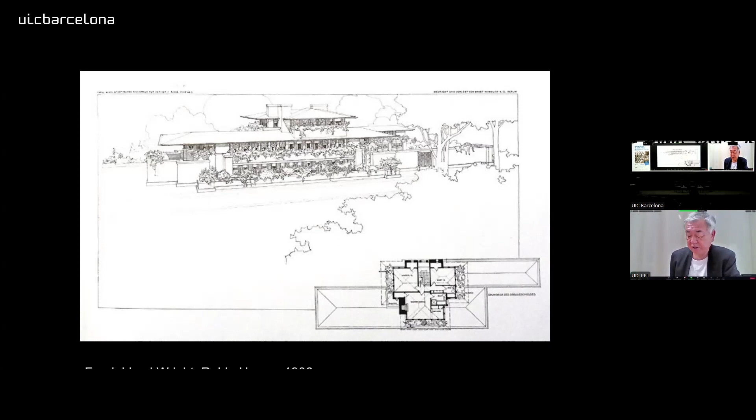In Japanese villages and towns, we had the mountain behind the village. That means the village was not away from the mountain — it was sitting beside the mountain, because their life could not exist without the natural resources of the mountain. All the materials they needed for life came from the mountain, and energy came from the mountain.

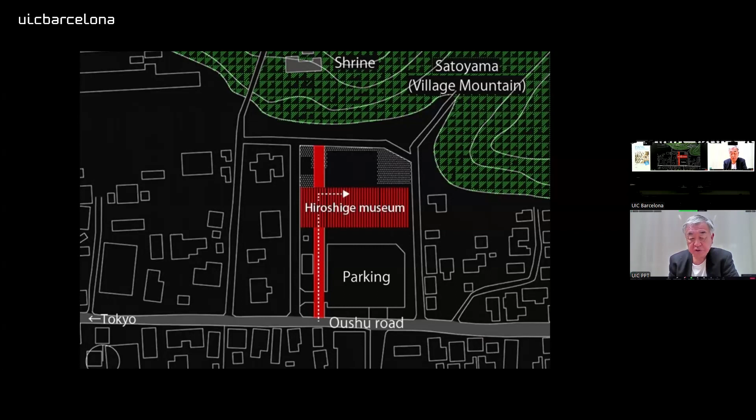The aim of the Hiroshige Museum is to reconnect the mountain and the village again. So we designed the passage to the mountain, and the approach to the museum is from behind the building.

Not from the parking in front. After passing the building and crossing the hall, people can find the abandoned shrine and abandoned Satoyama, and after that experience, finally people can enter the building, and through this experience, people can recover.

The connection is most important, and without the connection with nature, we cannot survive. This is a big finding of this approach.

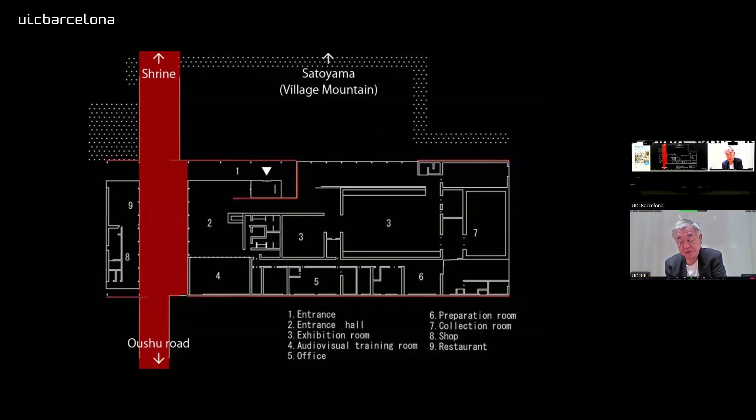Material-wise, we try to connect the mountain and the building again. It is a totally different approach from the 20th century, when materials for the building all came from outside the village. The concrete, steel, every material came from outside, sometimes from other countries. The cheapest material was the best material—this was a rule of the 20th century.

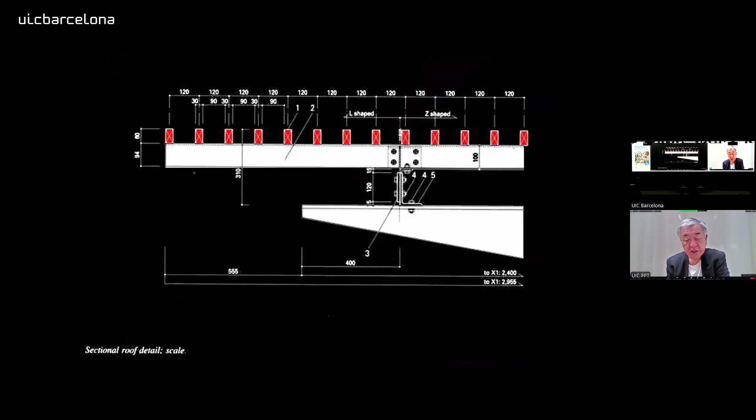For this building, most of the materials came from the mountain behind. The wood came from the mountain behind, and other materials, for example the stone, also came from the quarry of the mountain behind, and the white paper we used came from special trees of the mountain behind. Local craftsmen worked on the paper making, and most materials and craftsmanship came from connecting the mountain and the building.

This was the typical Japanese system before the 19th century. But in the 20th century, after American civilization came to Japan, that connection, that relationship, was totally forgotten.

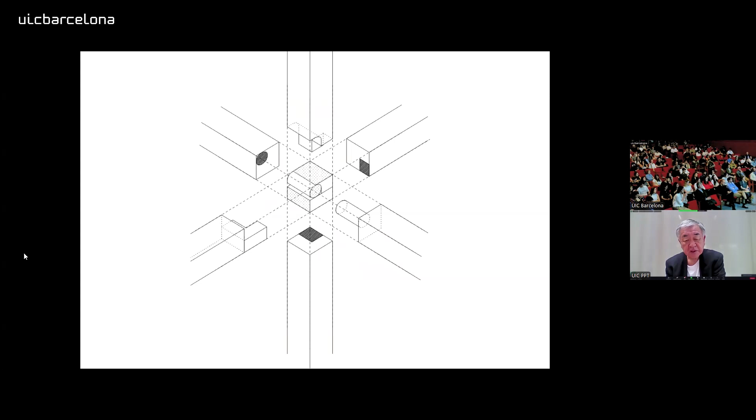It is a typical joinery of Japanese traditional building—three types of joints assembled together, twisted and finished. The Japanese carpenter provided us with this kind of small bar, and on site my students assembled them together to create this small pavilion, without any nail, without any metal.

After this project, we tried to bring this idea to a bigger project. At Tokyo University, Professor Sato checked the strength of this joinery system. This is a section of the museum.

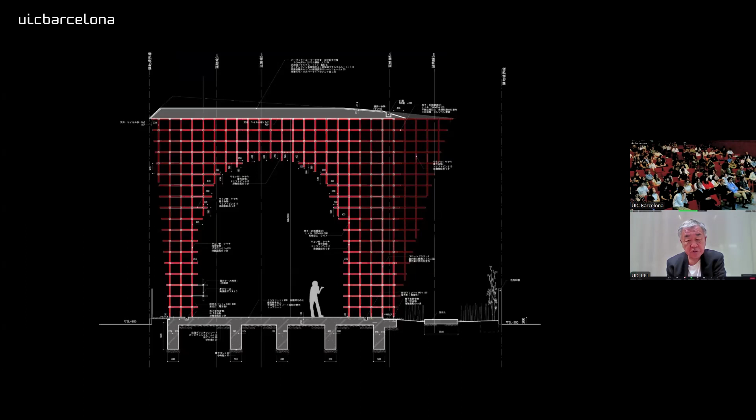The section of this—the size of these bars is 6 centimeters by 6 centimeters, a very, very tiny thing. We tried to create transparency and a relationship between exterior and interior—connected, but still we can have some privacy. A sense of safety and a sense of privacy is important for life.

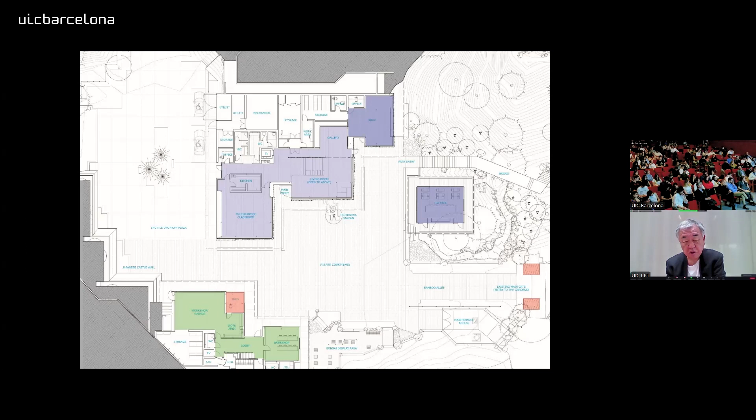And in the States, we did design a Portland Japanese garden with this cultural complex. Again, the building and the forest behind are connected by vegetation on the roof, and the life in the forest is merging into the building.

Life and artifact are not separated, they're connected. The building is not enclosed—every door, every window is openable, and the outside and interior are totally connected, like this.

We used local materials as much as possible, wood from Portland, Oregon, with transparency and connection.

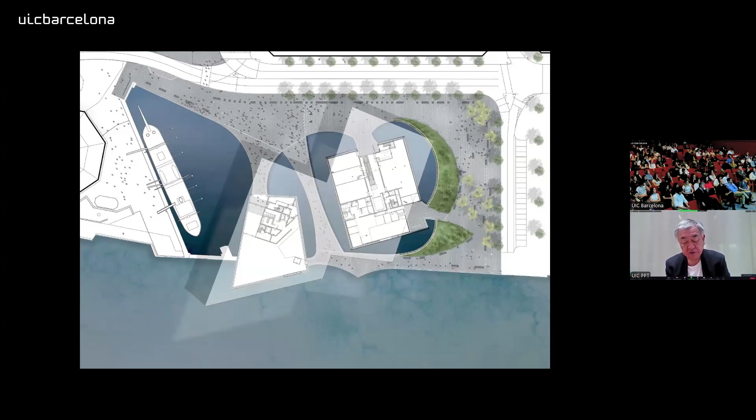In Scotland, this is a little bit different approach. We tried to connect the water and land. Close to the site, we found this beautiful sea cliff, and we tried to bring this relationship into the building—we pushed the building into the river, creating a new relationship between land and river.

For this, we didn't use wood because the condition is not mild. The facades, similar to the sea cliff, give a new impression for the building—it is not an artificial vertical wall. The porous wall creates a new, soft relationship between the environment and the building.

In the center of the building, we cut a hole—a similar approach to the Hiroshige Museum, where we cut the building to connect the village and the mountain. In Scotland, we cut the building to create a new relationship between the city and the river in front.

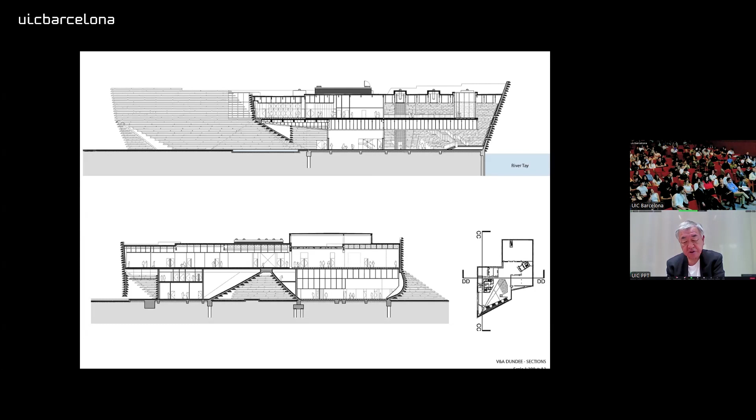In the building, we used local wood to create another type of cave. Avoiding vertical walls is the same approach, and people call this building a living room for the city, as they come to the opening. As in Denmark, an example is the Christian Andersen Museum.

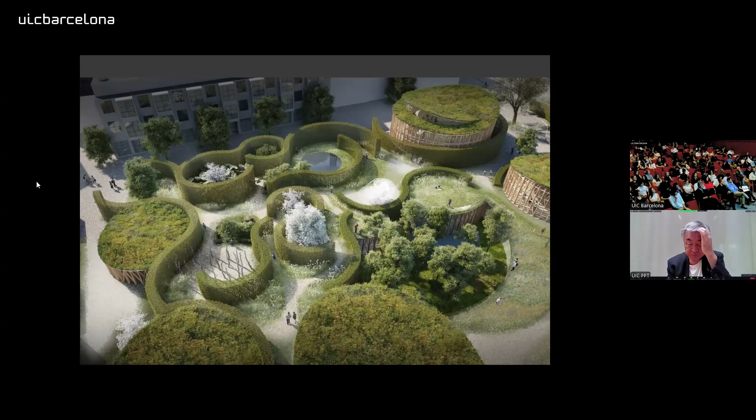This is a rendering for the building, in the city called Odense. This is not a big city, and most of the buildings have a low silhouette. We tried to merge the museum into this low silhouette.

Finally, our solution is the museum as garden. The height of the museum is lower than the neighboring buildings, with wooden structures and a wood outside margin.

Christian Andersen is a famous fairy tale author, and each fairy tale is connected with gardens. The kids can enjoy the secret feeling of each garden.

Green is again the best way to create the space. Instead of a wall, we used green for making the story and for making a special experience for kids.

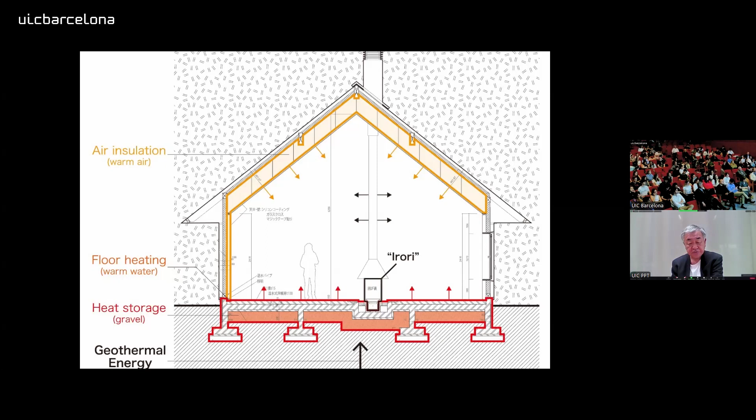We learned that system and applied it to this experimental house. Without insulation, this system can warm up the space even in minus 30 degrees, so people can enjoy the warmness and softness together in this house, like this.

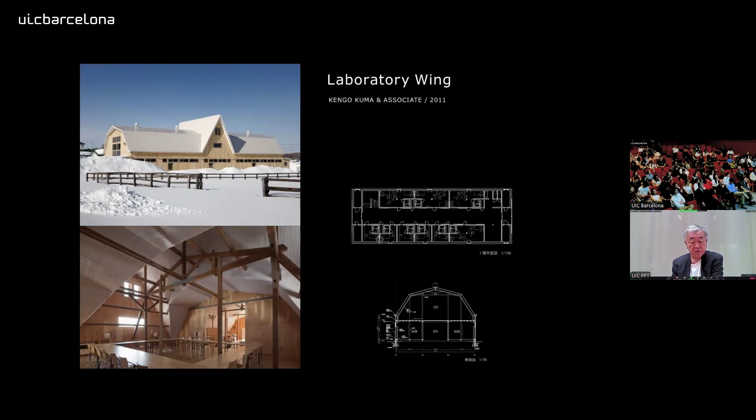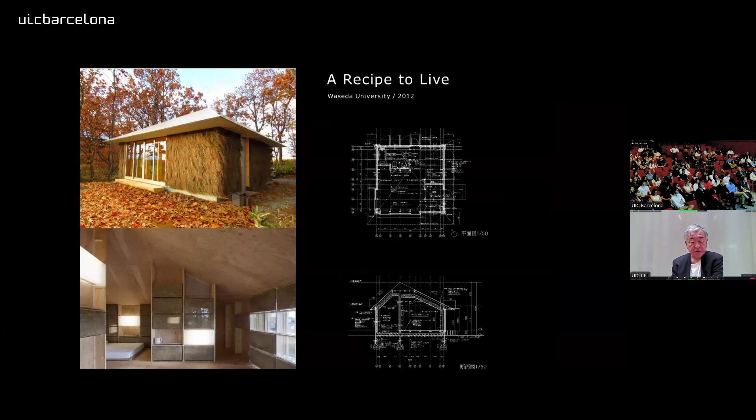In this Hokkaido area, as part of Tokyo University, I still teach at Tokyo University, working with other universities to create experimental houses. This is an experimental building by Tokyo University, a collaboration with other universities including Keio University, Harvard, and Berkeley, and Dutch academies. We really enjoy the collaboration with other universities to find unique ways in the tough climate.

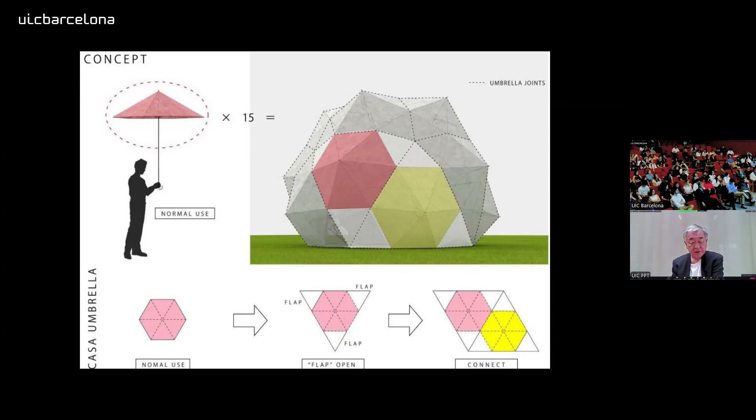This small project is for the Milano Triennale. It's a small house for disaster. We used umbrellas. Our idea is that if 15 umbrellas are assembled together, they can become a new house. It's a special umbrella we designed for this disaster house, and 15 students worked together to assemble those umbrellas.

Another softness, another lightness, another relationship with the environment. The material unit is just the umbrella. Structurally it's a tensegrity structure, so we didn't create a frame. Membrane and very tiny bars work together. It's the magic of tensegrity.

The 15 students, after working together to assemble it, drink together and sleep together in this small pavilion. It's another nomadic lifestyle. This is the material.

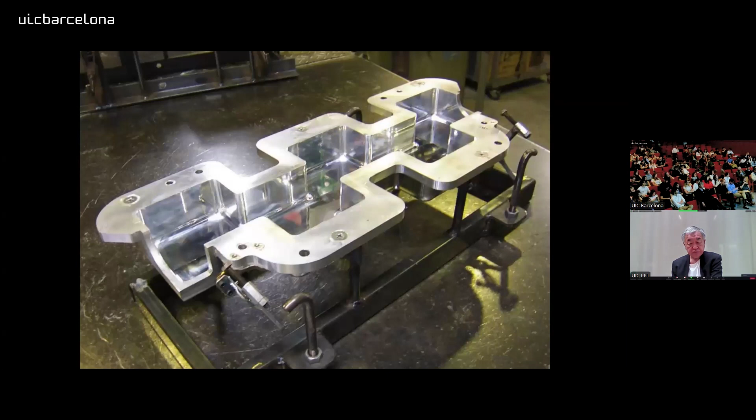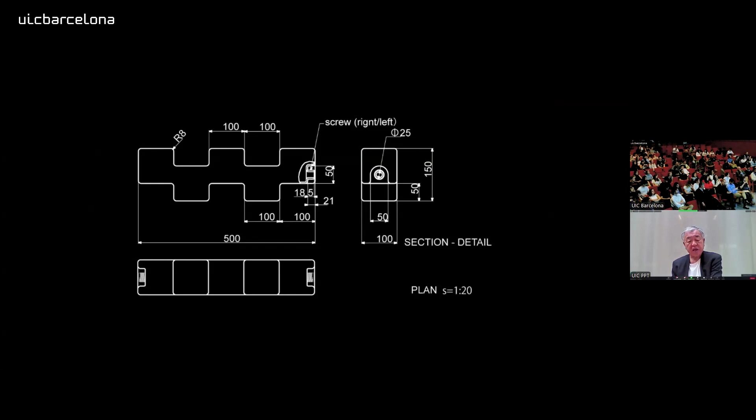This is the process of making the poly tanks. This poly tank has two valves to create the water flow to the adjacent tanks.

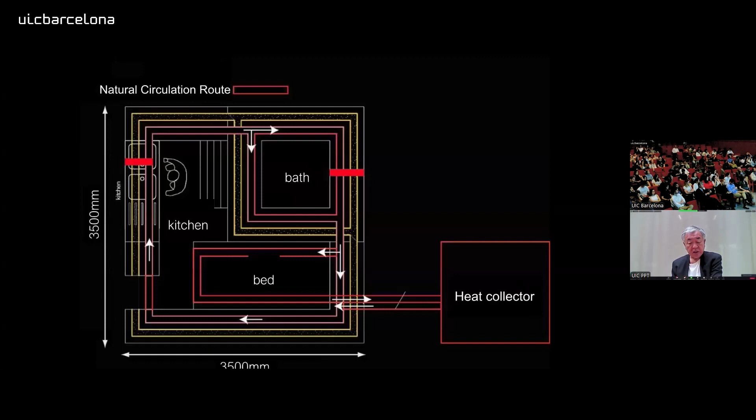And this is connected to the unit that can control the temperature of the building, the wall, the floors, and the ceiling. They're all connected with pipes, and the heated waters and the chilled waters can change the temperature of the place.

Our idea is a kind of body of life. Our body is always controlled by the flow of blood and flow of other liquids. Flow is a key word for life, and the flow is related with connectivity with the environment, a relationship with the environment, as our students really enjoyed making this.

This is an experimental pavilion. This is the interior. One single unit can make every necessary furniture. The bathtub, the sofas, and the kitchens are all made by one unit. It is similar to our body. The small cells can create anything.

That idea is very different from the biology of the 19th century. In the 19th century, people thought we were an assembly of organs - the stomach, bones - but now new biology teaches us that we are assemblies of small cells, and the flow of liquid connecting those cells. It is a new idea of philosophy, a new idea of biology, and we try to apply that idea to the building.

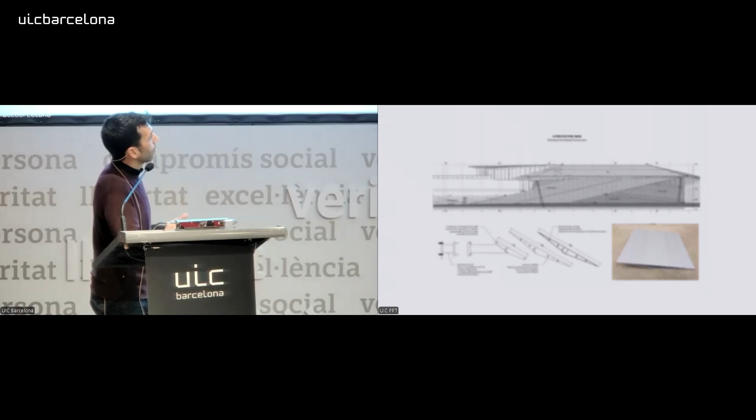We had discussions with the companies about the finish of these metal plates, and contrary to what they expected, we didn't want any perfect finish. We were trying to make the company do mistakes in the chain of production so we'd find some scratches all around the mock-ups. As you can see, we have these traces of the extrusion process that we wanted to keep as part of the language and roughness of this metal facade. We're very interested in taking this industrial process and making evidence of the process of production of these pieces.

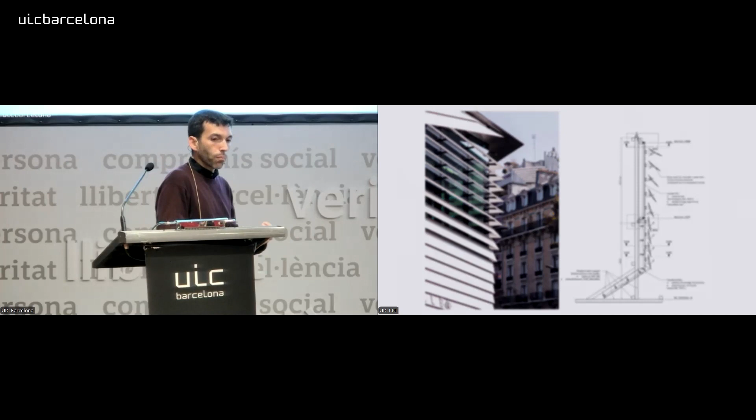Of course, it's a museum of photography, so we were asked very intensively about controlling the light. One of the most important points was how to provide a scheme that protects from direct sun from south and east, and how we could filter light. So here we have these louvers that get twisted, and they allow the light to enter in a very subtle way inside the museum.

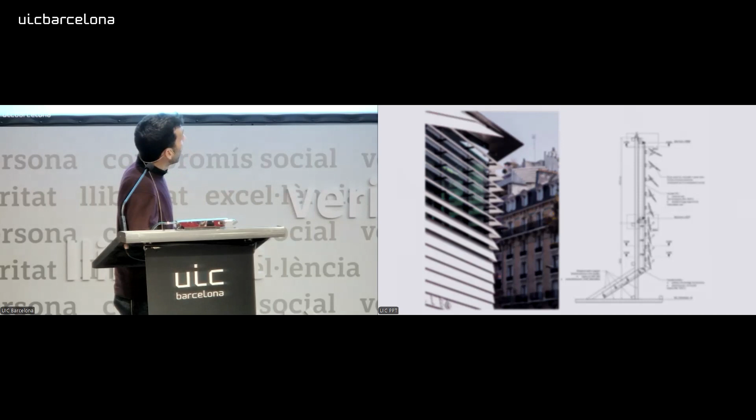This is how, if you go now to Boulogne, it looks like. We have this kind of feeling of a wall - it's even a bit aggressive somehow, but the idea was to really separate the boundary of civilization and garden.

Now is when things get interesting, because Japanese tradition has always worked with a task repeated over centuries: enclosing a garden and later creating a threshold. The idea of a threshold in Japanese tradition is key. If you ever visit Japan, you'll see that whenever you access a garden or building, the way you access it is super thought out.

The Chinese tradition arrived over Japan and imposed some symmetrical models, palaces, etc. But actually, Japanese people never really absorbed this symmetry, this symmetrical design. They always worked in an asymmetrical way, and this is related somehow even to the ancestor religion they had, Shinto, where they believed that if you gave spirits a straight line, they would enter. So they tried to generate other lines in order to avoid it.

There are these kinds of primitive beliefs that are very interesting. Even when you go to a tea house, like Kuma was talking about, it's not only the tea house, but the access to the tea house, what's called the roji, the path leading to the tea house.

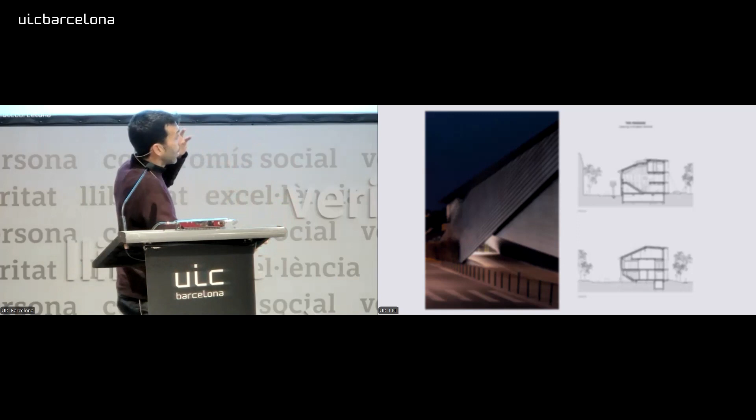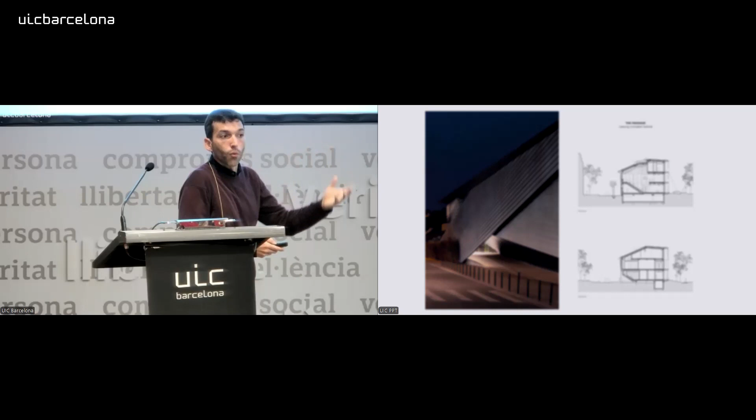And this tunnel, if you ever go there, believe me, you start forgetting the noise of the city, the noise of the cars. You are preparing your mind for the discovery of a new realm. That's the garden.

So this is the moment of the folding, the passage. Maybe not the most conventional way to access a museum, but we wanted to create these sequences of access that lead to a first courtyard placed here.

It's actually an open lobby, because from there we can distribute the program, but this diagonal was one of the key features of the proposal—this oblique access that suddenly discovers this tiny space and also gives you a first hint of the garden just across.

And we had to respond to all French regulations about accessibility when doing a folding—handicap access, and visibility for people with visual problems.

So we were working with concrete again, an industrial product, an industrial material, but trying to craft it, trying to make it somehow a material that could turn back to a less industrial way of putting it.

So what we did was, as you can see here, we brought in a tool from Japan in order to create these undulations that were reminding us of Zen gardens, in order to respond to French regulations about accessibility. We learned with the company how to use this on such big pieces.

They were passing this tool like the monks in Zen gardens that use it to decorate the garden—I don't know this word in English—but the same thing, done in concrete.

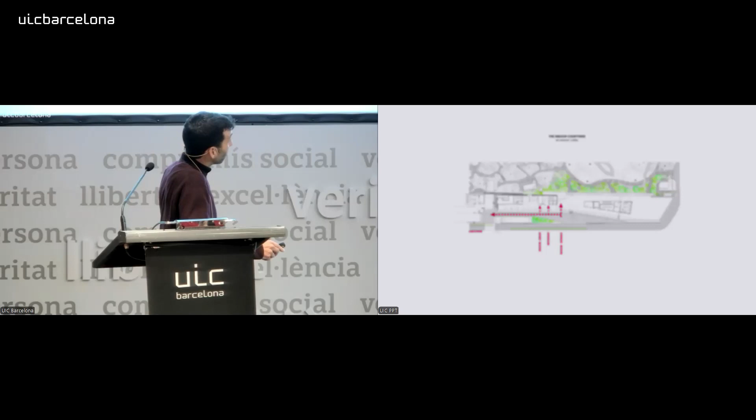But we will talk about this later. Let's see, this is the moment of the entrance, but let me introduce you to this second main concept of this project, which is the Engawa.

So we have seen this very enclosed facade facing the city, but what was the relation towards the garden that we wanted to propose? Because this was the key feature of the building.

So in Japan there is a particular space called Engawa. This is a term that doesn't exist in the Chinese language—it's a Japanese term. I say this because a lot of elements of Japanese culture were absorbed from China and Korea, even Buddhism arrived through them. But Engawa was something very particular to the Japanese home.

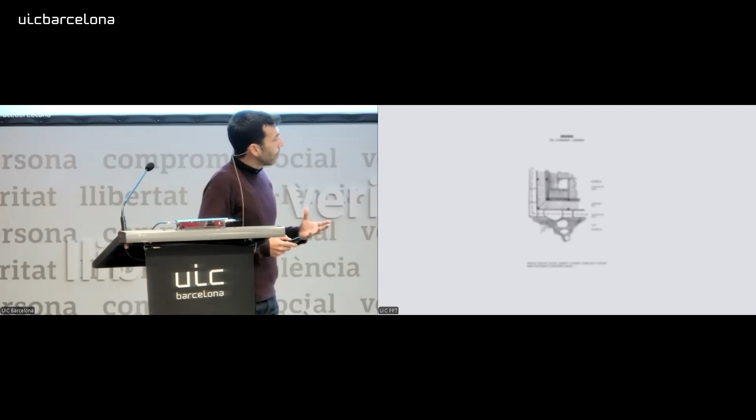And if you put Engawa into Google, you will find a bunch of translations. I noted some of them: veranda, balcony, corridor, platform, circulation, buffer zone, transition space, fluid space, contemplation device. What's interesting is that this semantic plurality means this space is something very ambiguous, and it's something we really wanted to try to find.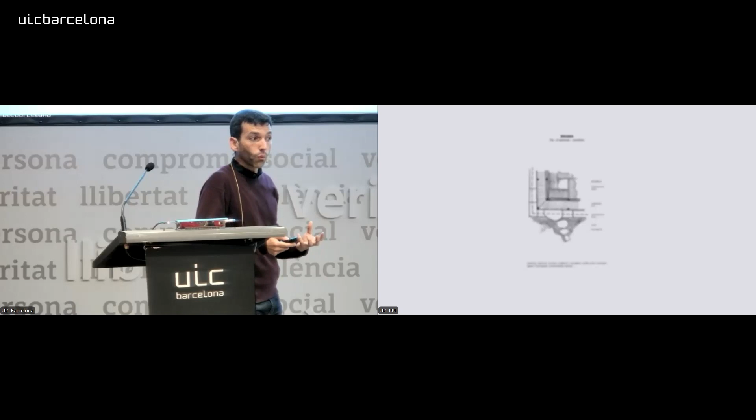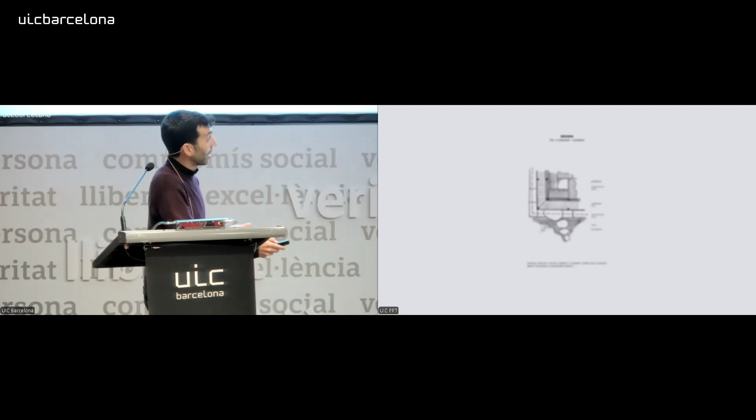These moments where you are not inside, not outside—it's a space of circulation, and at the same time a space of contemplation of the garden. So this is actually a device of Japanese architecture that is very complex and very rich.

This is a photo of Albert Kahn, again in the garden, and we have an example of Engawa right in front of us. You can also find them, for example, in this famous house in Kanazawa that you should visit if you never visit Japan—you find this space there.

We don't know if we are in between, if we are outside. This is this very particular device that surrounds the whole Japanese house. It really connects all the spaces—there are no corridors inside. People walk through this exterior platform to access the different spaces.

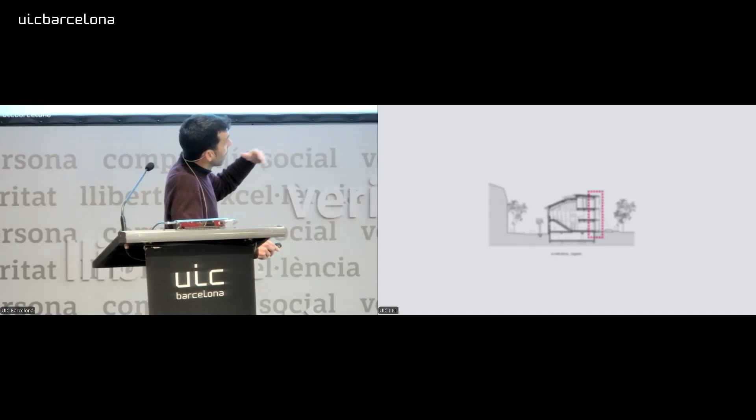So we used this device for all the connections of the different pavilions with the garden. I will enter a bit more in detail in this one. As we can see, in the main building, we are using this device in the facade facing the garden, creating a multi-story Engawa at different levels.

We can see here how we implement this concept, quite straightforwardly. This is the in-between space I am talking about, between the garden and the building. Depending on the moment and the light, you feel more connected to the inside or more connected to the outside. The screens here open and close the views.

Let me talk a bit more about this, because there is this element that comes with Engawa in the Japanese tradition called the sudare. If you ever visit a traditional Japanese city like Tokyo or Kyoto, you will find these kinds of stores everywhere. These are very thin bamboo slats hung from every house. It's a very typical device.

What I think is important is that this is not only a sunscreen protection, though it is. It's not only a way to filter light, though it is that as well. But most importantly, it's a device to create uncertainty, to divide a space while remaining connected through its ambiguity. So what we were very interested in was this kind of crossing views.

These traditional sudares create an effect that, in Japanese, Kuma-san always calls komorebi. That's the way light gets filtered under the leaves of a forest, creating a very soft, gentle, nice light.

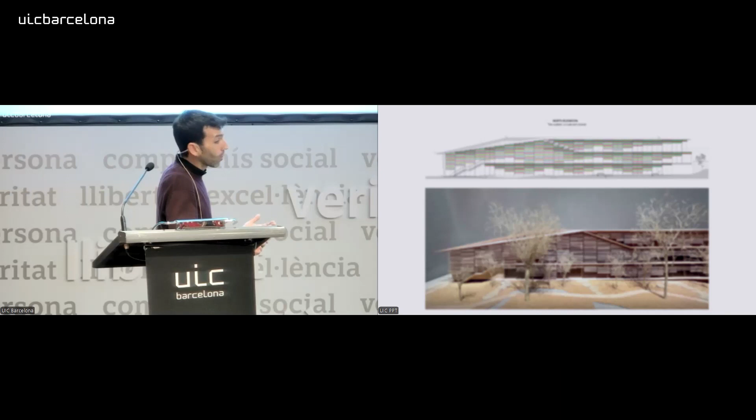Here we are with this north facade where we created a sudare at 3 levels, creating screens that open up towards some views and close others, creating a mystery between the garden and the building. As you can see, we implemented a color code for every wooden louver.

Why? Because we come back to the idea that Kuma-san talked about: the particles. If you remember what Kuma-san said at the beginning, the importance in our design is selecting one particle, one piece at human scale, and multiplying it to generate and cover huge surfaces. This is a design methodology we use a lot.

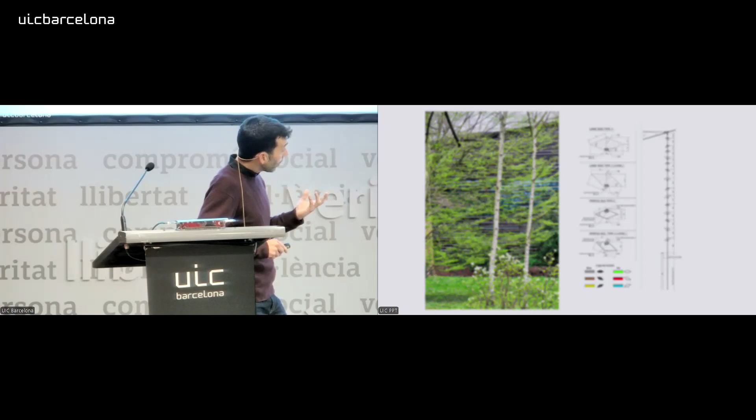So in this case, we selected one single shape with two materialities. We did one with anodized aluminum and another in wood. We just set different positions of it.

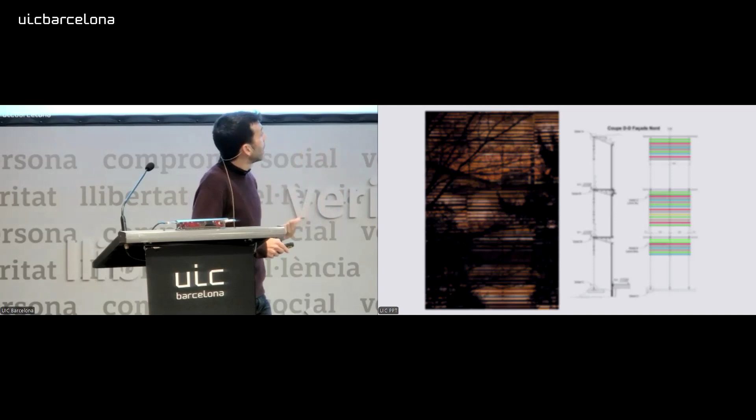Here we go to the overall image of the building. For us it was a real concern how to deal with this facade, because the place was so magic that when the client wanted such a big building in front of this amazing garden, we were even scared about what the result could become. So for us, the idea of disintegrating architecture into smaller pieces, making the building disappear somehow in the shadows with a display of depth, was one of our main goals.

Let me also introduce you to this Engawa that we're talking about, where we also start having the physical connection with the garden. If we come back to the photo I showed you previously of the Albert Kahn Museum, we have here what is called the Kutsunugi Ishi, the stones where Japanese people remove their shoes before entering any Japanese house.

So we were also trying to connect the garden and the Engawa using this same device from traditional Japanese architecture, in 3 points. We can see here the 3 stepping stones going down toward the garden, because we had a difference in level.

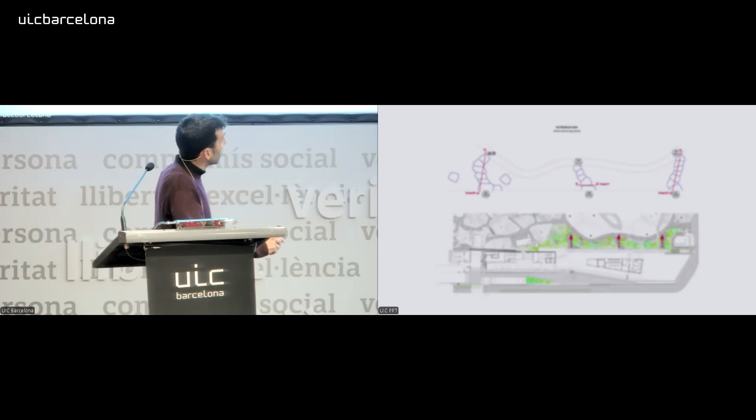And even we did one of these as a ramp for handicapped people. In this connection, we designed together with landscape designer Michel Desvigne the shape of these stones, and we cut them very roughly. We brought them inside, granite stones, and it was a very funny process because the stones were huge. We brought them on site, and you can see the companies working on them with the chisel, trying to give this kind of roughness as if the stones had always been there.

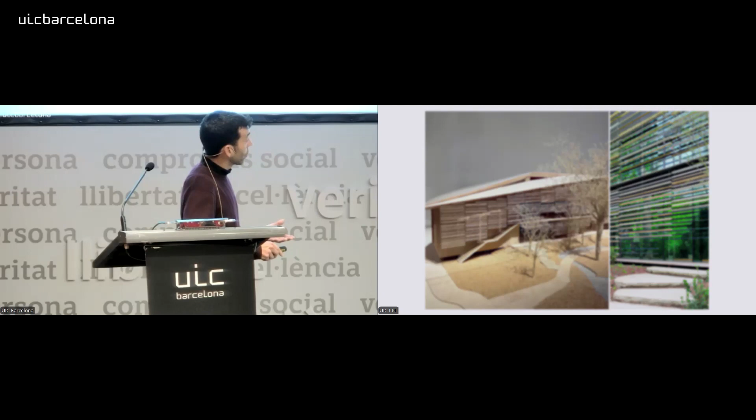So the result is these connection stones that connect the engawa with the garden through these passages in the middle of the garden. Now let's come to the interior, because the language of the Sudare also has a dialogue with the ceiling we have inside. We also follow this language of stripes in the ceiling of the museum, because this ceiling gets merged with the Sudare when we are looking at this building from the garden.

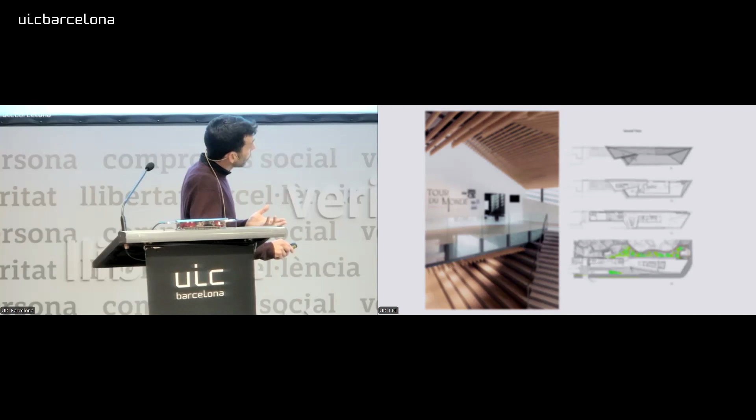We were using this wooden ceiling to cover all the roofs of the interior spaces. The way the museum works is always a big atrium that connects all the levels, as you can see here. And then, let's say, a parcours, a promenade along the central core to discover all the exhibition space where the autochromes and the photographs are exhibited.

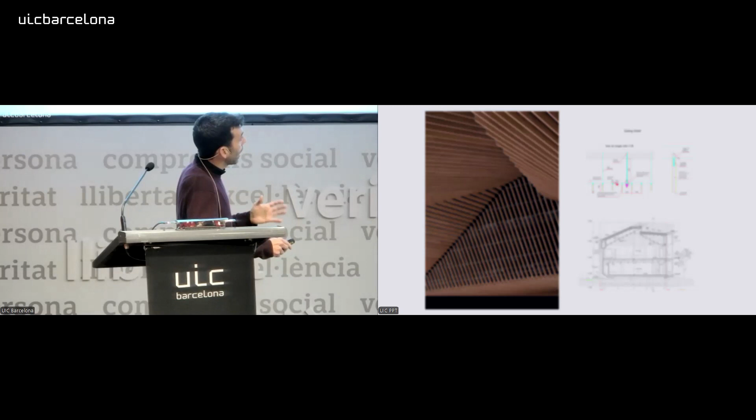This display of the wooden roof is this kind of folding of the roof, which we folded like a paper, like an origami. We also tried to provide some points of entrance of light, always trying to control the amount of light being inside in order to not disturb the museography.

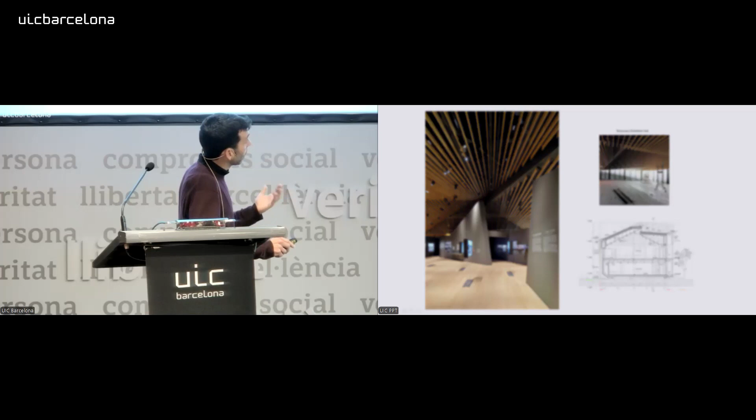So we can see here the actual museography inside of the building, and also when they are dismantling the museography, the soft light that enters through the metallic facade that I showed you at the beginning. This photo is particularly interesting for us because it starts again merging nature and architecture.

And let's continue with the other pavilions, because apart from this extension, we also did the renovation of the rest of the pavilions, which was also a huge task.

So we were fascinated by the roof of this building, because we have the garden just climbing on the other side - it's a fantastic section. And then we have the roof going down till the street. So this roof was very inspiring for us. When the machines entered to demolish the interior, we felt like we were in the interior of a boat, something like this. It was very mysterious.

So actually we wanted to emphasize this idea, and we were also paying attention to the only exception that this roof had, this triangular shape at the center where we placed the central auditorium. We designed some wooden louvers in the ceiling, this time curved, to emphasize this feeling of being inside of a boat. As you can see in the section, this is where we are placing this roof, which integrates all the MEP placed behind.

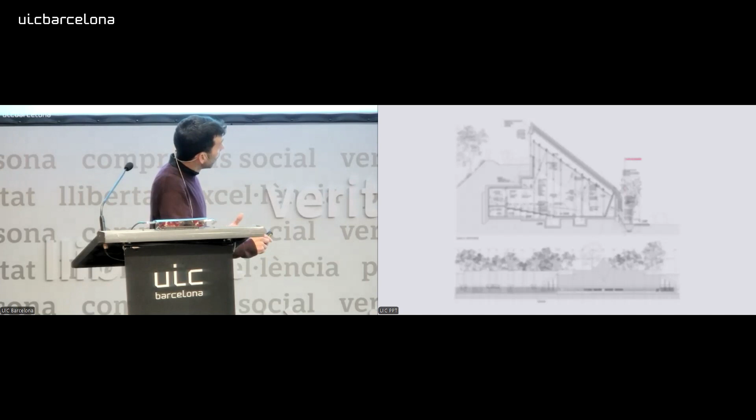And again, how we are always controlling the light being inserted inside. So later we moved to another very special space, this auditorium, as I was saying before. This was the central position of the roof, where we had this triangular shape with a triangular window at the top - this was this window here. So we wanted to take the opportunity of having this exception in the geometry to work with it. This was the geometry that actually created the idea of how to generate an auditorium at this position.

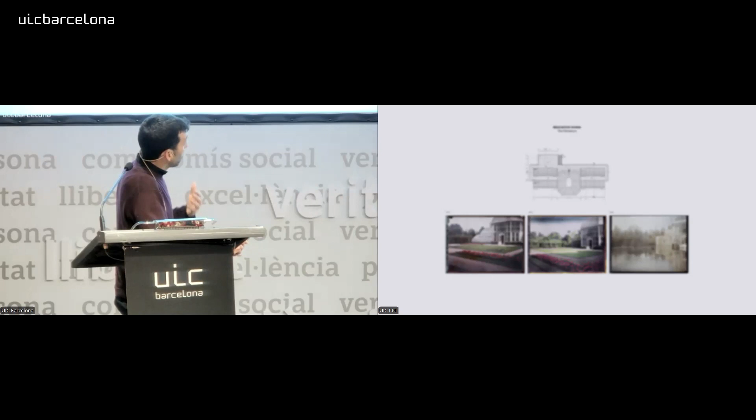Just not to extend too much my presentation, let me pass through very quickly to some of the pavilions that we also renovated inside the garden. For example, this one here, this was the Palmarium. We were looking at the pictures of the past, because the current stage where we found this palmarium was some concrete walls and an isolated palmarium in the middle. But we discovered, checking the photos, that we had some structures in the past at the beginning that were also hosting plants. Of course, now the client wanted to host a part of the collection of the photographs outside.

So what we did here was to evoke again this curved shape of the greenhouse that was at the beginning, to extend or reproduce the exact same shape that it had in the past. And in this case, we were using metal, following the tradition of iron and glass buildings of this time when the palmarium was produced.

So I just wanted to pass very fast through this, because as you can see, in just one project we are dealing with so many different materials, trying to understand the past of the different pavilions that we had, and how to reinterpret these materials in a contemporary way in order to produce something that talks again to tradition, but also in a contemporary way.